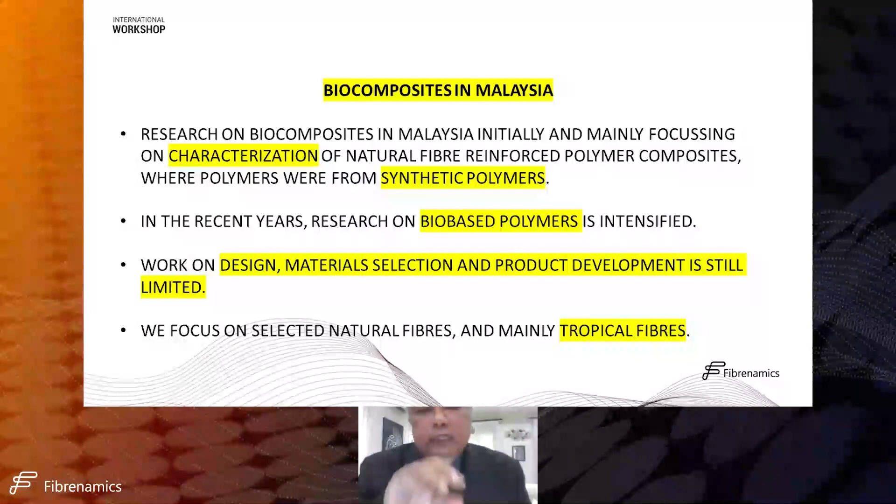This is one thing our research group has done, on design—mainly conceptual design, materials selection, and product development, including life cycle analysis. There was a question to Dr. Mariam earlier; we have done some work on life cycle analysis, but for the natural fiber, we mainly focus on tropical fibers.

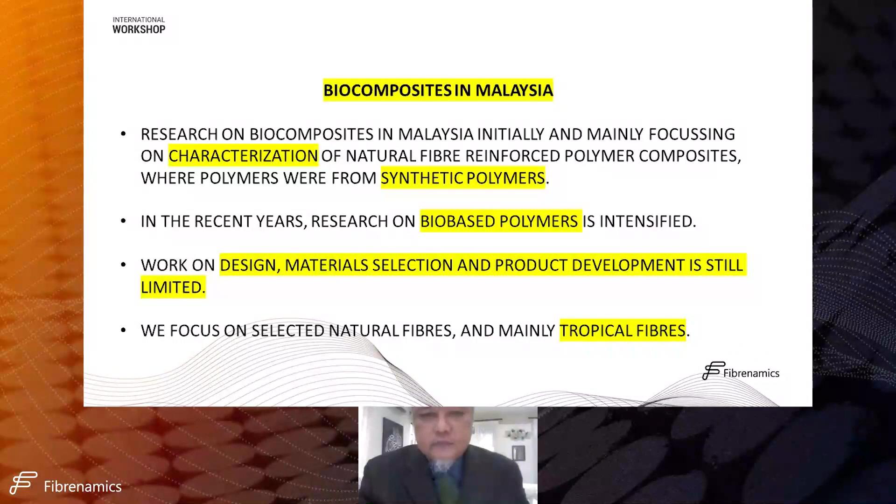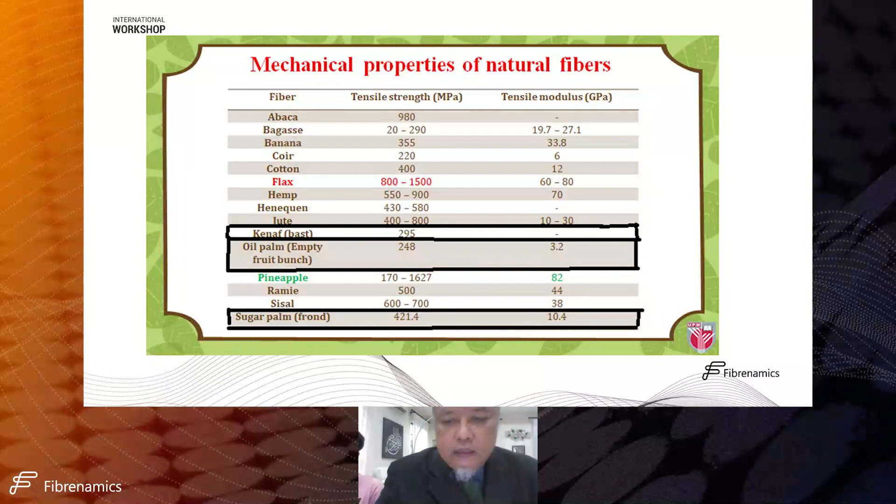Another important fiber our research group is working on is sugar palm. I think this plant is not known to many people, but this is our main strength. It has quite good tensile strength, 421.4 megapascal, and 10.4 gigapascal modulus. I will go into detail on these three main fibers that we work with for biocomposite.

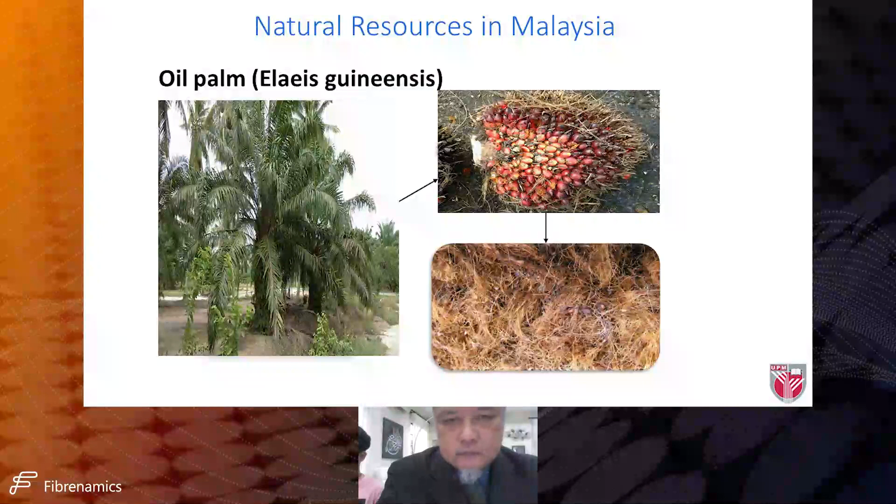Let me explain briefly the history of oil palm, or palm oil. In our country, the first plantations were mostly established and operated by British plantation owners, such as Sime Darby and Boustead, and remained listed in London until the Malaysian government engineered their Malaysianization throughout the 1960s to 1970s.

The latest information about this product: last year, Malaysia accounted for 25.8% and 34.3% of world palm oil production and export respectively, meaning a significant amount of world palm oil production.

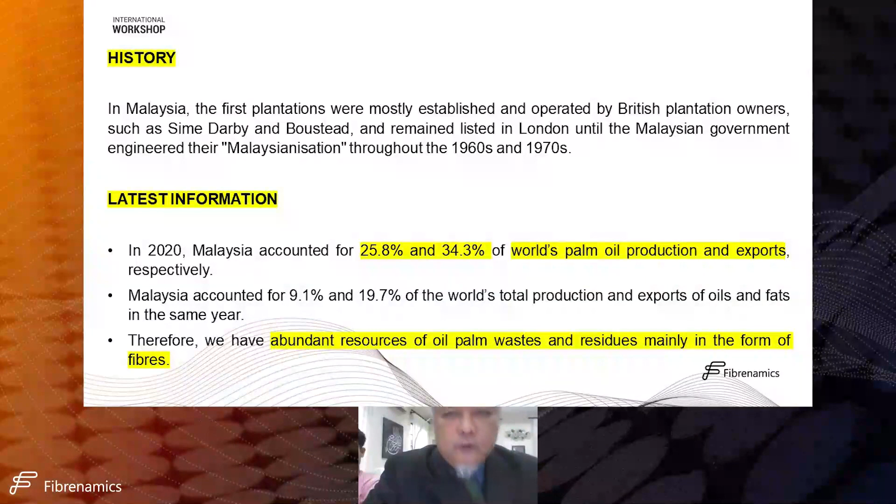Malaysia accounted for 9.1% and 19.7% of the world's total production and export of oil and fat in the same year. Therefore, what I can conclude is that we have abundant resources of oil palm waste and residue, mainly in the form of fiber, that our research group has made or will make full utilization of.

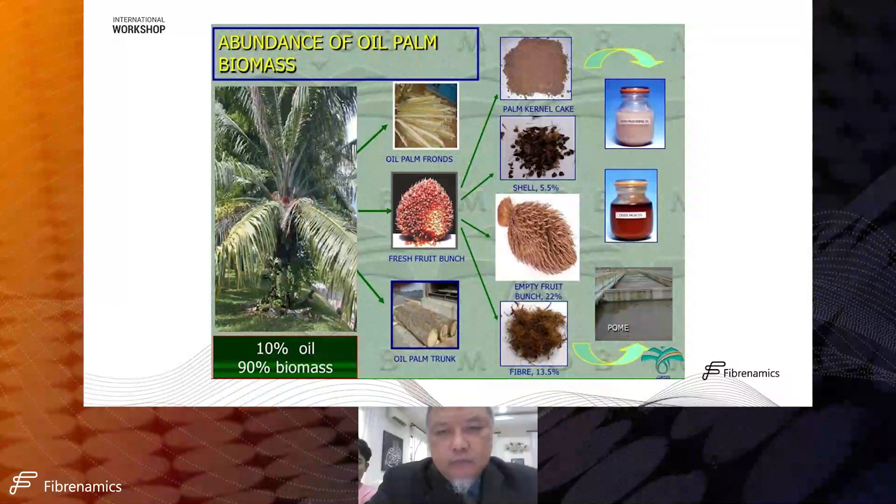...effluents. And from this, I can conclude that 10% goes to oil, but 90% is biomass.

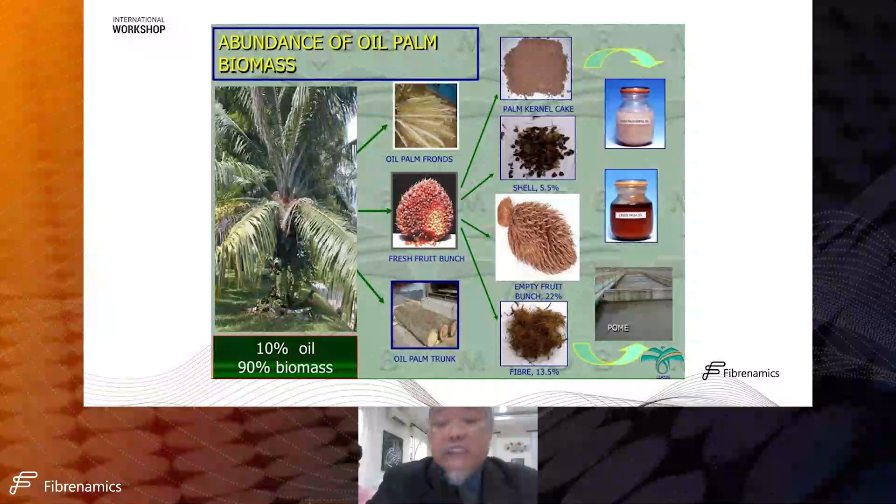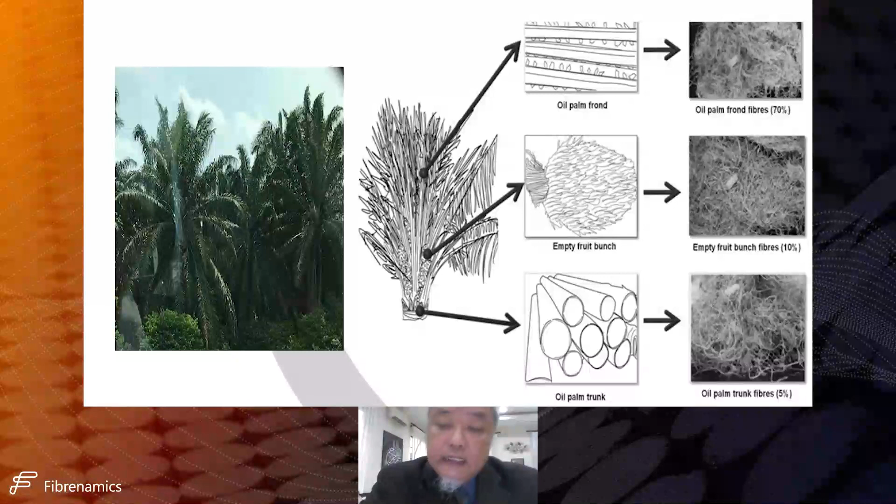Okay, we focus on the fiber alone. So look at the plant. We see that oil palm fronds produce oil palm frond fiber, which is 70%, and the empty fruit bunch gives us empty fruit bunch fiber, which is 10%, and oil palm trunk gives us oil palm trunk fiber, which is 5%.

The oil palm fibers are used as reinforcement and fillers in composites, in biocomposites. They are used with thermoplastic, mainly, and thermoset, including biopolymer. This composite has wide application in furniture and automotive components.

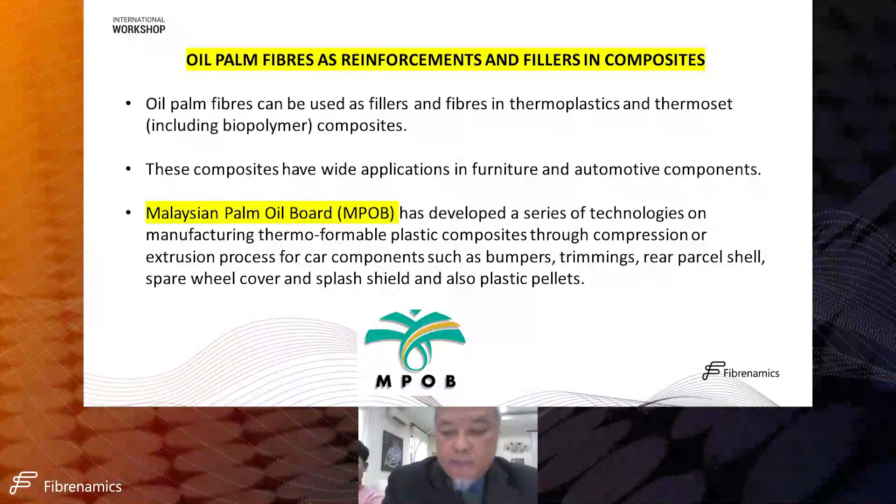Malaysian Palm Oil Board, MPOB, has developed a series of technologies on manufacturing thermoformable plastic composites through compression or extrusion process for car components such as bumpers, trimmings, rear parcel shelf, spare wheel cover, and splash shield, and also plastic pellets. Now I will explain the research work that we have carried out.

Using oil palm fiber, it is quite recent. The grant was provided by Sime Darby, a quite famous company, so they provided us some money. We are working on developing the safety helmet through a holistic integration of practice, ergonomics, and engineering among oil palm plantation harvesters. This is the title.

This project is huge. It's not just focusing on natural fiber composite, but it is beyond that, working on the ergonomics and other design aspects. But at the end, one of the products is the biocomposite safety helmet.

So there are 4 objectives of the work. The one related to this lecture is the development of a sustainable material to improve the newly proposed customized safety helmet.

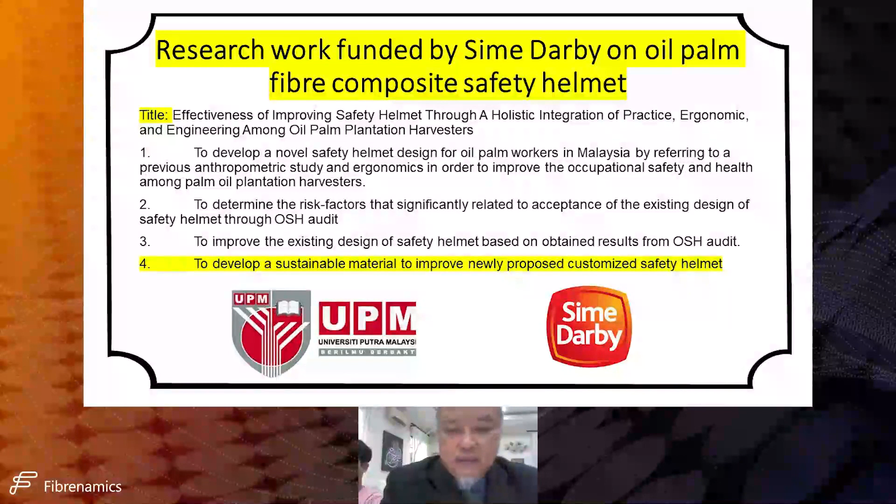The journey of making a safety helmet for agriculture - it is none in the world, so we tried to develop the safety helmet for plantation workers to protect at least the head and body.

Empty oil palm fruit bunch fiber composite is very promising material to be commercialized, especially for low-cost products. The fiber itself is not capable of producing very high impact product and high structural product, but for the low-cost product it has been implemented. Low cost means cheap raw materials, requires less energy to fabricate, and most importantly, the material is environmentally friendly.

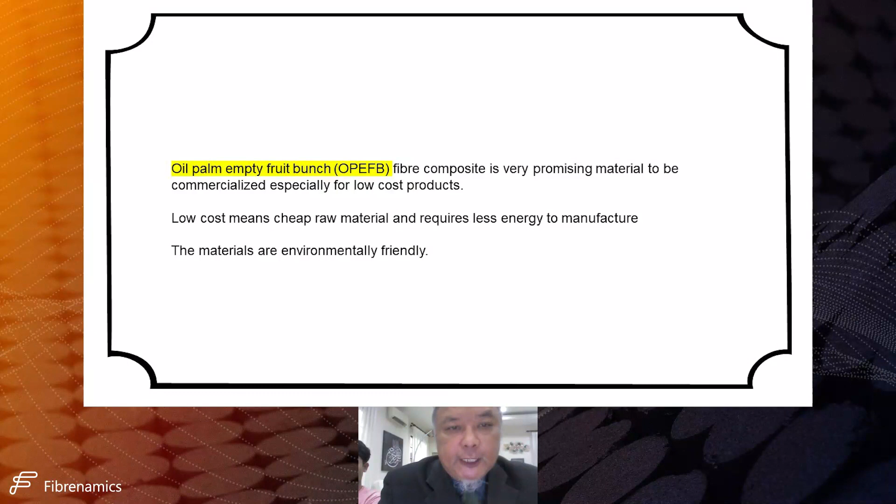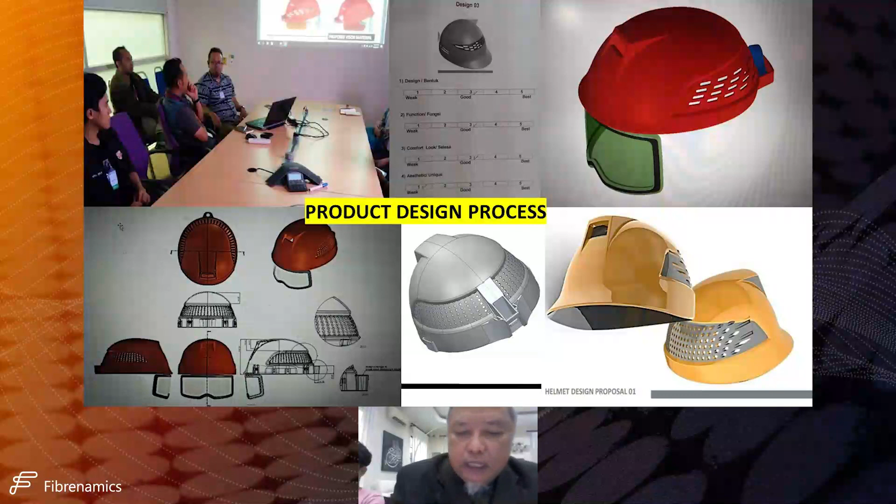We have done a series of designs to improve, because it's a new product, so to develop the new design for the plantation workers. A group of designers sat down together and came up with a concept of the helmet, and through some prototyping, a 3D model and solid modeling.

We have done some publication work. Mainly we start with the hand layup process. I think this is quite a simple process, but to start with, to produce the prototype, we managed to produce 20-30 helmets from the oil palm. But I just want to emphasize here, this is only at the developmental stage.

We produced the helmet, and we also took care of the aesthetic value, the finishing, the painting. This is some of the effort for improving the product. We do some kind of testing, fitting all the accessories on the helmet.

This is what we hope from the project, that one day Sime Darby will implement it for each and every worker working in the plantation. We can use this in Malaysia, and in our neighboring country, Indonesia. But I just want to highlight here, we have not...

This product has not been used yet, but it has been submitted as the final product and was launched by our former Prime Minister in one of the events. To me, this is something new that we have done for the benefit of the people.

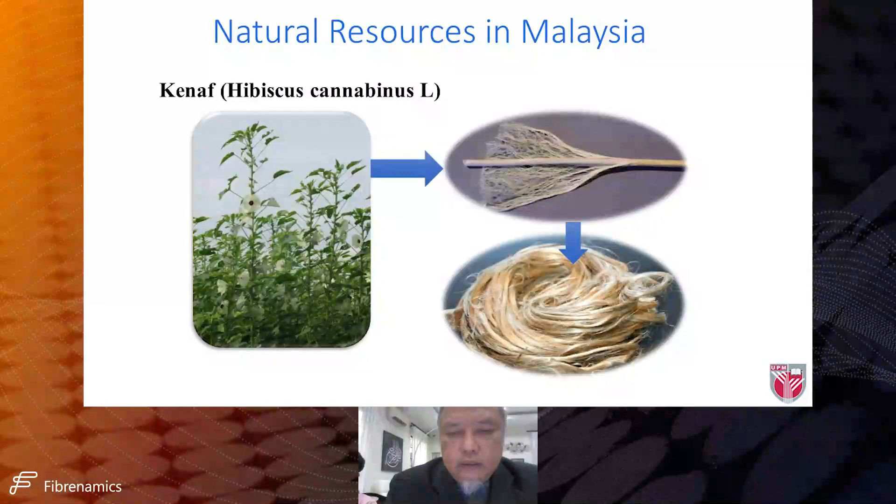I just want to do some introduction on the kenaf industry in Malaysia. Kenaf was introduced in Malaysia in the early 1970s and was recognized as a potential alternative fiber material for the pulp, paper, and wood composite industries in the late 1990s under the 7th Malaysian Plan, 1996 to 2000. Compared with other plants, the yield of kenaf is relatively higher, up to 25 tons per hectare, thus presenting more economic advantages.

For the past several years, kenaf fiber has been shown to be suitable for composite applications such as particle board, MDF, wood plastic composite, non-woven material, and pultruded product. The characteristics of kenaf fiber are similar to those of wood compared to hemp, flax, and jute fiber. They have similar properties.

According to research results, kenaf yield of 12 to 30 tons per hectare is greater than hemp, flax, and jute, thus providing more cost-effective raw materials. It was reported that under the Malaysian climate, yield of kenaf varies from 2 to 25 tons per hectare.

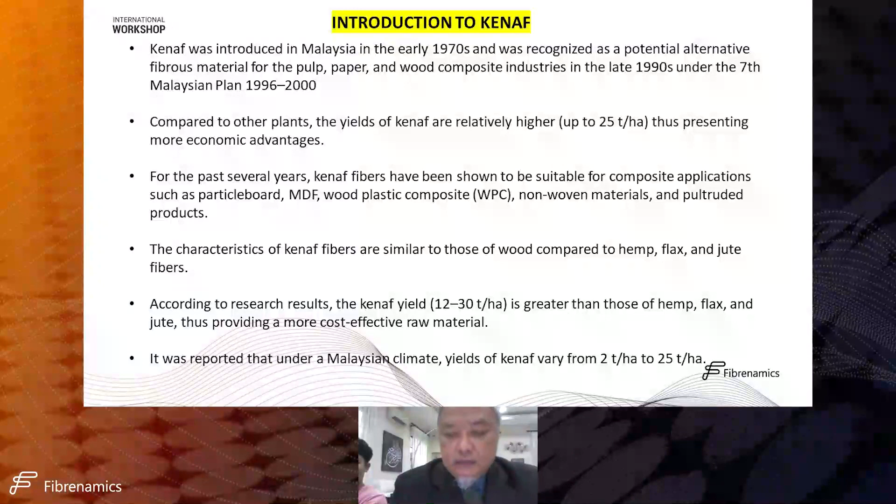This is the board, the agency that deals with kenaf, the National Kenaf and Tobacco Board Malaysia. This agency was actually meant to slowly replace tobacco, which is why the name kenaf and tobacco is included together. We have done quite a number of works on kenaf.

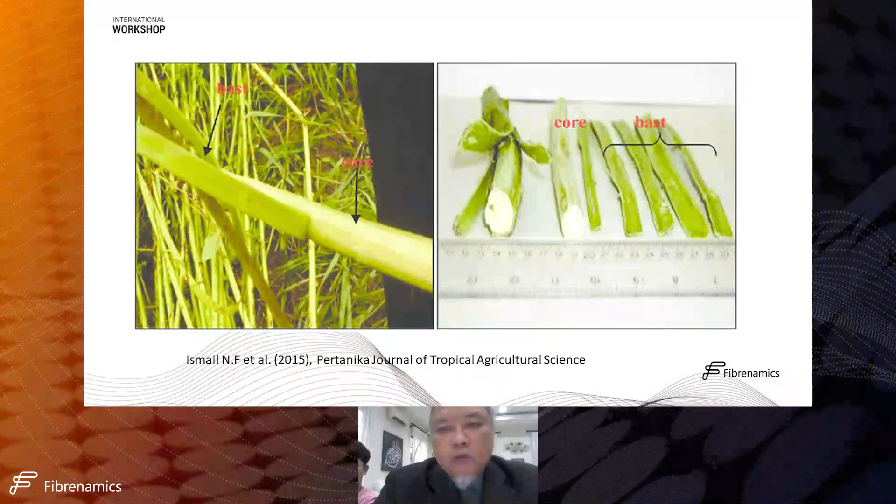We published work with CRC Press three years ago on kenaf fiber and composite. As you can see here, kenaf comprises the bast and core. Both bast and core can be used for biocomposite.

I want to share some properties of kenaf and non-wood fibers. Kenaf bast tensile strength, as I mentioned earlier, ranges from 295 up to 1,191 megapascals, and the modulus can go up to 60 gigapascal. They are quite comparable with other important fibers like hemp, jute, flax, and sisal. I also include oil palm, which is our main product, as comparison.

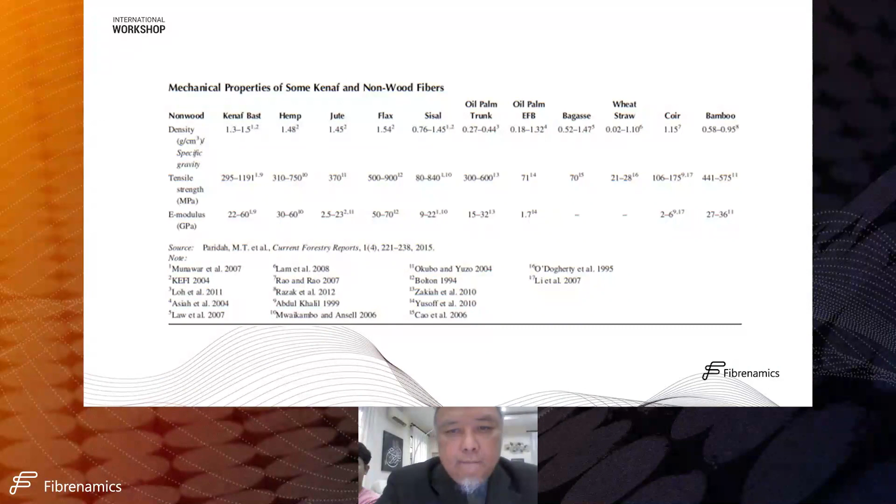I want to share one of the recent research works on kenaf, for the defense industry: hybridization of Kevlar and kenaf fiber reinforced epoxy composite for ballistic protection. Our colleagues at UPM are working on armor protection, as shown on the left hand side, but my research group focuses on work on spall liners for military vehicles.

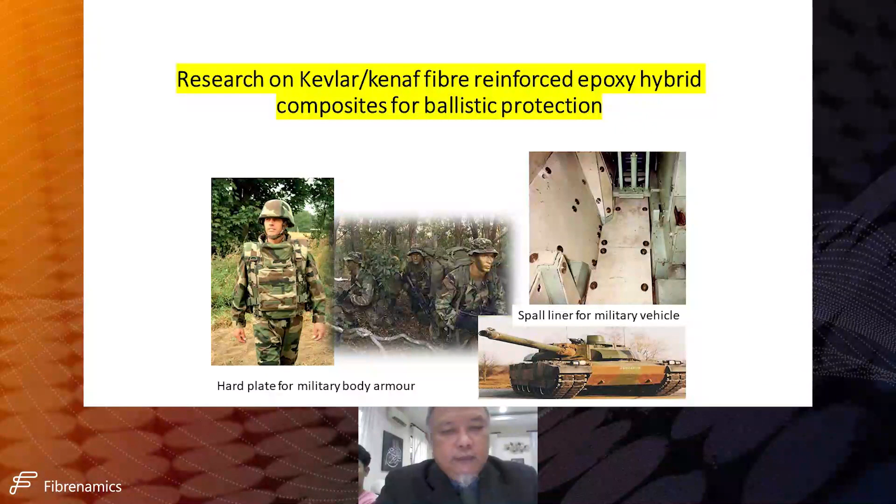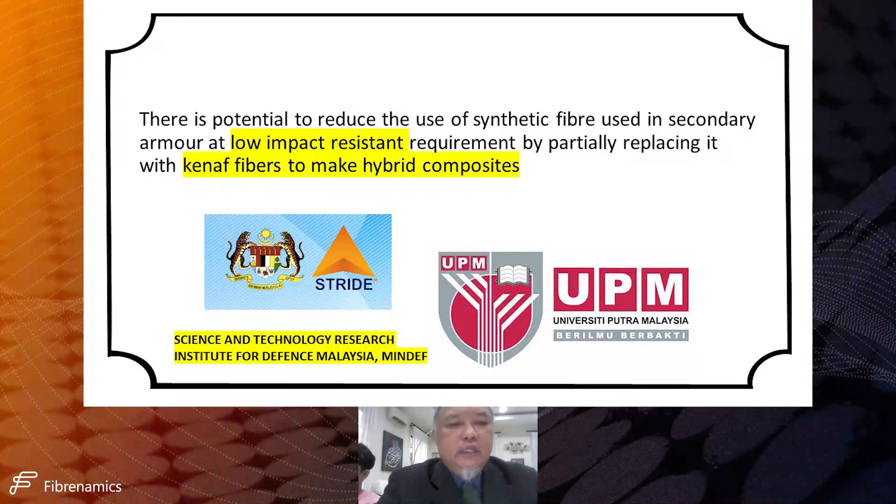So to develop and study the use of kenaf in hybridization with Kevlar for the spall liner, one of the important components in a tank, the work was done in collaboration with the Science and Technology Research Institute for Defense Malaysia under MINDEF. We want to produce this - I mean there is potential to reduce synthetic fiber by replacing it partially with kenaf fiber to make a hybrid composite.

Now this is the spall liner that I mentioned. Spall liners are composite panels made mainly with synthetic fiber, mounted to the inside of the shell structure of armored vehicles. They protect personnel inside by catching small fragments of the outer shell blown into the vehicle by the concussion of incoming ordnance before it contacts them.

Used alone or in combination with metal or ceramic, spall liners help increase crew survivability in combat. You can see in the picture at the bottom, with spall liner and without spall liner, some safety issues can be solved or minimized. In the market, spall liners are made using woven glass fiber, and also polyethylene and polypropylene with aramid fiber - this is what the products in the market look like.

So we try to replace, or at least incorporate and hybridize, kenaf fiber, so that at least some green material will be inside those vehicles.

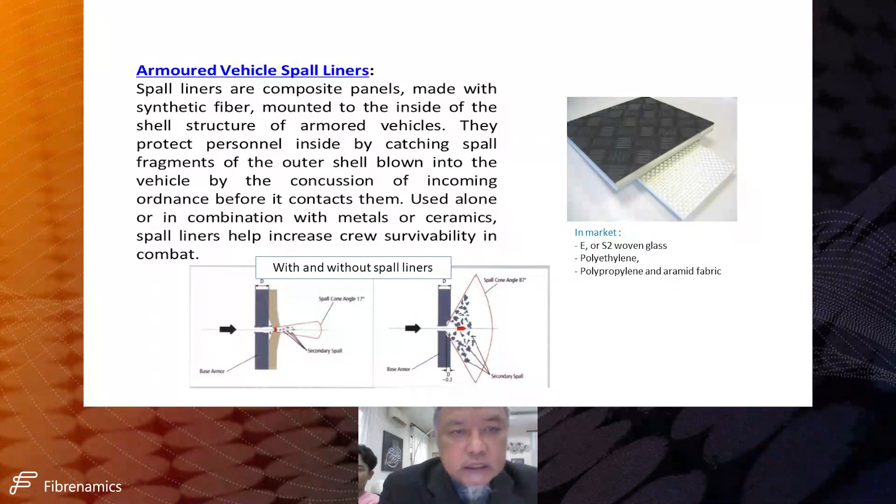The left hand side is all Kevlar, and B is the hybrid of kenaf and Kevlar. The left hand side is all Kevlar, and B is the kenaf and Kevlar hybrid. C is also hybrid but with a different arrangement. D is also a hybrid again, and E is all kenaf.

So what we did was check which combination is the best, to investigate which one performs best. Of course all Kevlar is the best one - I think this is quite common sense. But we wanted to see what the contribution of kenaf is there.

Kenaf and Kevlar fabric were hand laid up with the epoxy matrix by mixing epoxy and amine hardener in the ratio of 2:1, and two thick mild steel plates were used as the mold.

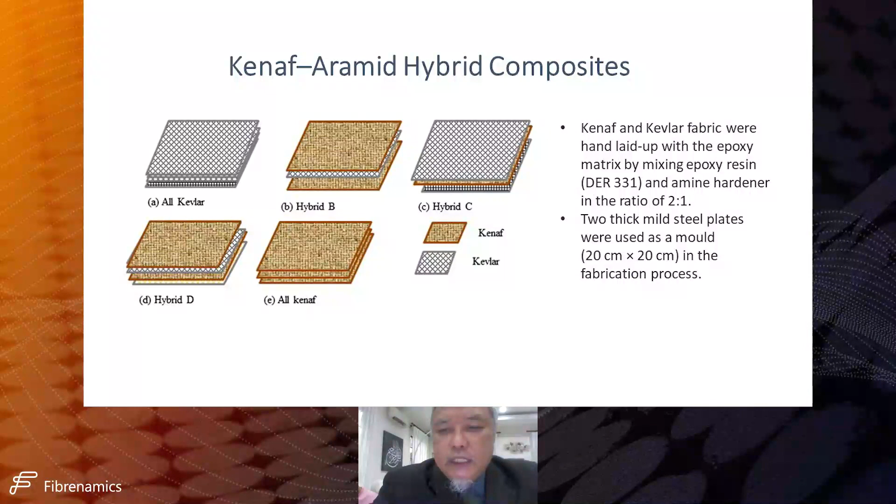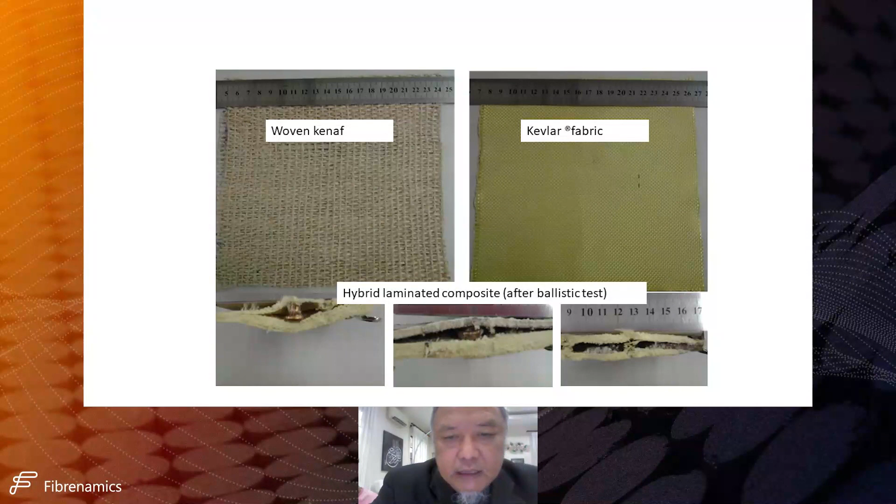This is quite simple - this is the outcome, or the material we use: woven kenaf. Woven kenaf, by the way, is not easy to get - not many companies are producing that. Mainly we can get kenaf in the form of non-woven, and Kevlar on the right hand side. So we tried to hybridize them. The photos below show the hybrid laminated composite after the ballistic test.

We carried out quasi-static punch shear tests to study the penetration resistance of composite under static load, focusing on the penetration process, penetration resistance, energy absorption, and failure of hybrid laminate composite. This experiment was carried out to understand the penetration behavior of Kenaf-Kevlar hybrid laminated composite under quasi-static loading. On the left-hand side is a schematic of the quasi-static punch shear test, fixtures, and the conical shape penetrator used in this study.

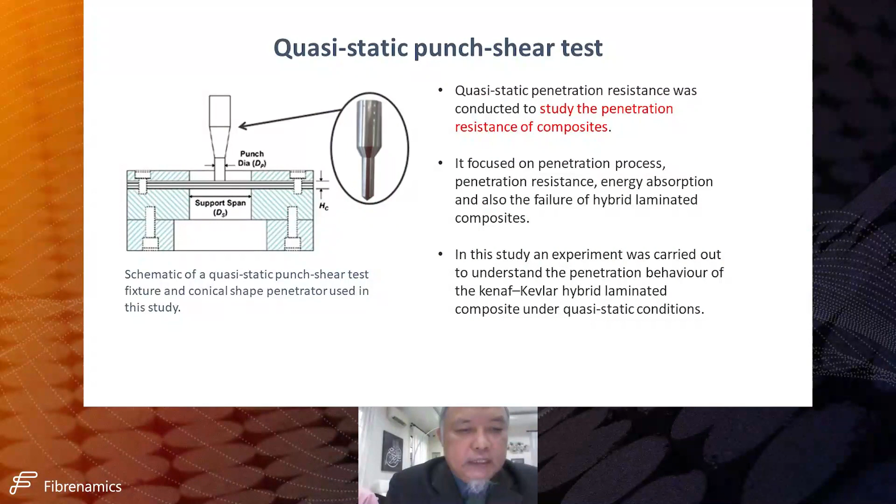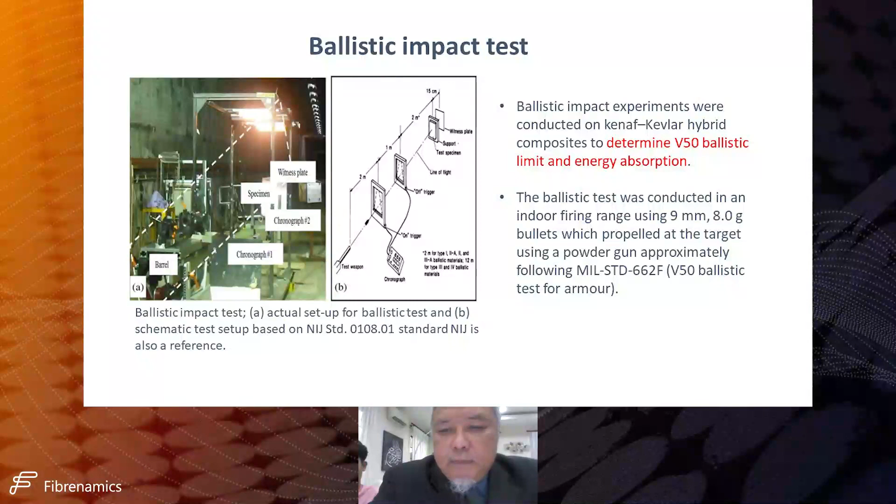The ballistic test was conducted in an indoor firing range using a 9 millimeter, 8 gram bullet, which was propelled at the target using a powder gun, approximately following the standard for ballistic test for armor.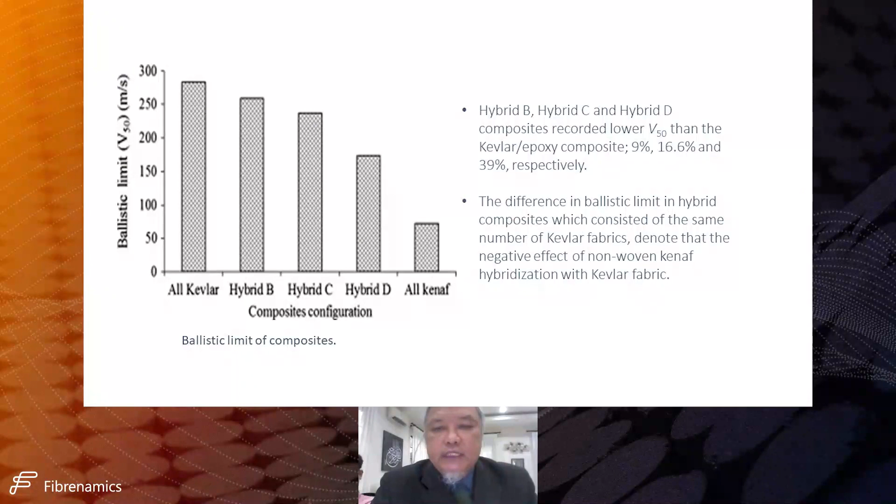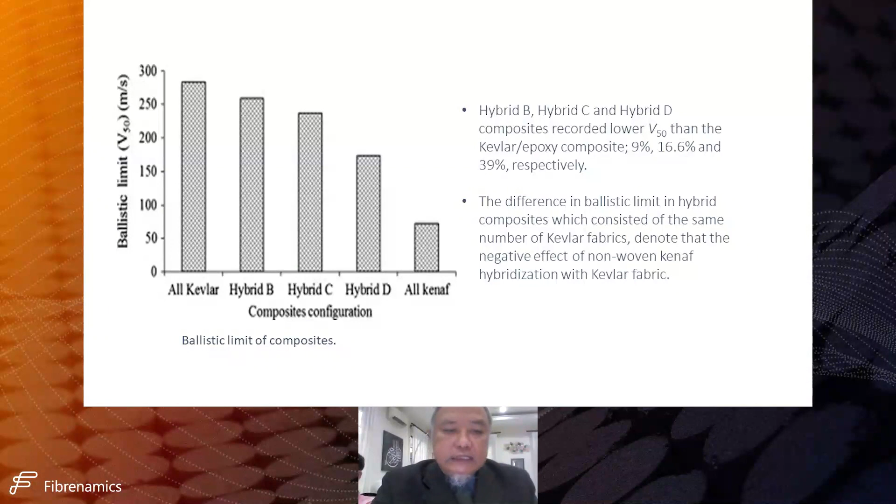This is some of the results we obtained in terms of ballistic limit, comparing the material from all Kevlar to all Kenaf. We can see all Kenaf has got the lowest value. Hybrid B, C, and D recorded lower than Kevlar epoxy composite by 9, 16, and 39 respectively. The difference in ballistic limit in hybrid composites, which consisted of the same number of Kevlar fiber layers, denotes the negative effect of non-woven Kenaf hybridization with the Kevlar fabric. So we can see that with Kenaf, the value is reduced.

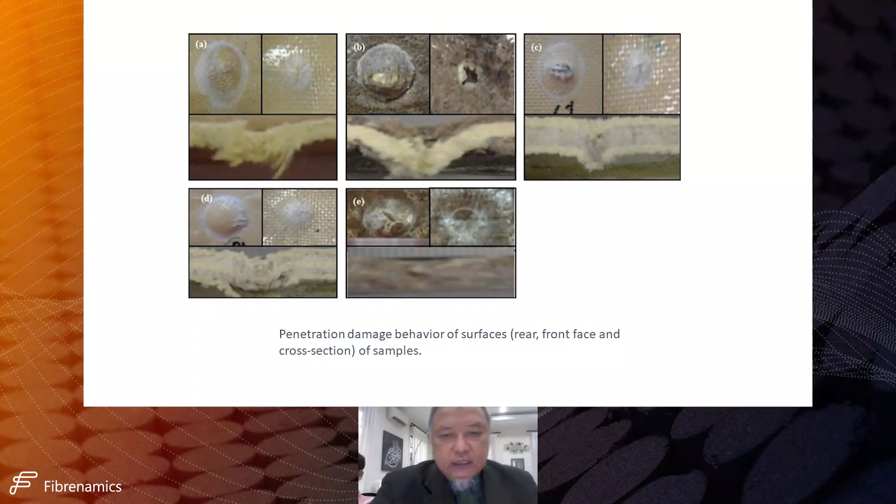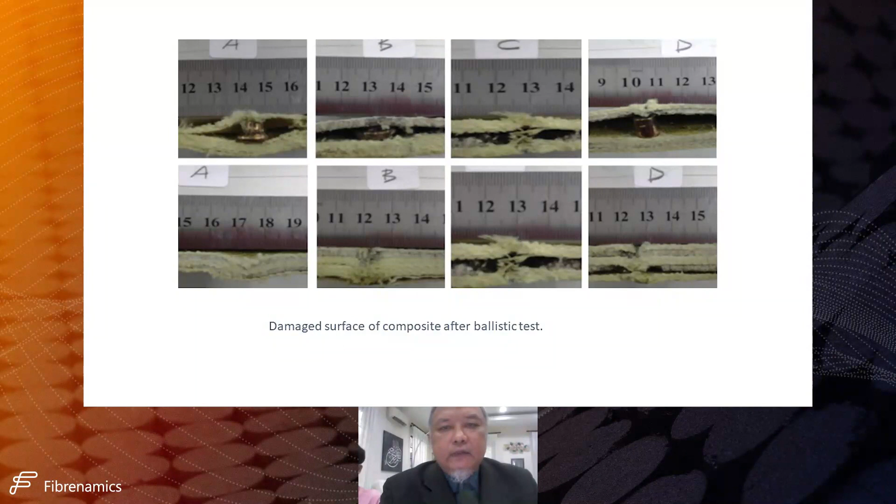This is a picture of the penetration damage behavior showing the rear and front surfaces and cross section of the sample, and the damage surface of the composite after the ballistic test. From this study, we wanted to see where Kenaf can contribute in terms of ballistic study in the defense industry. With this, we managed to publish, and will soon publish, a book called Composite Solutions for Ballistic Applications, which includes our work on the use of Kenaf and natural fiber composite in ballistic applications.

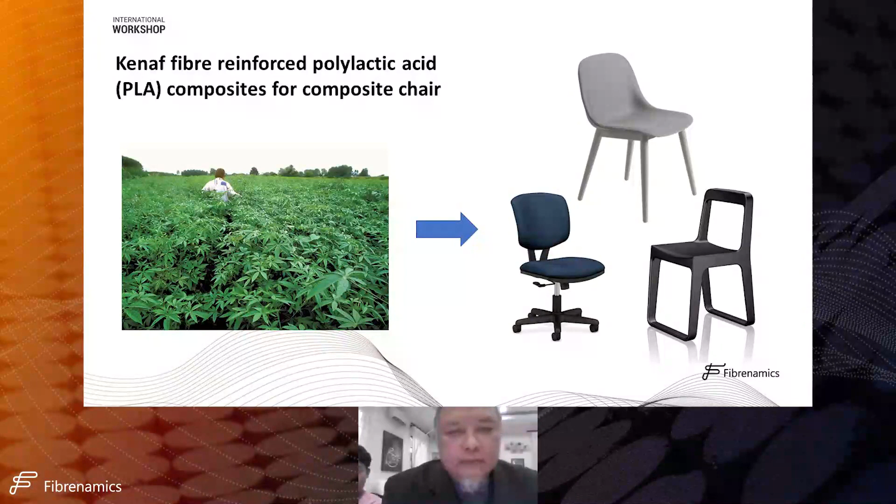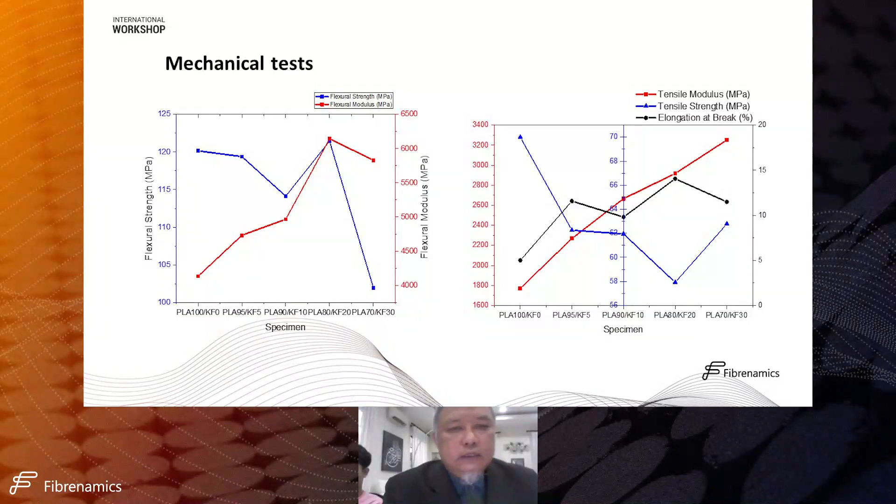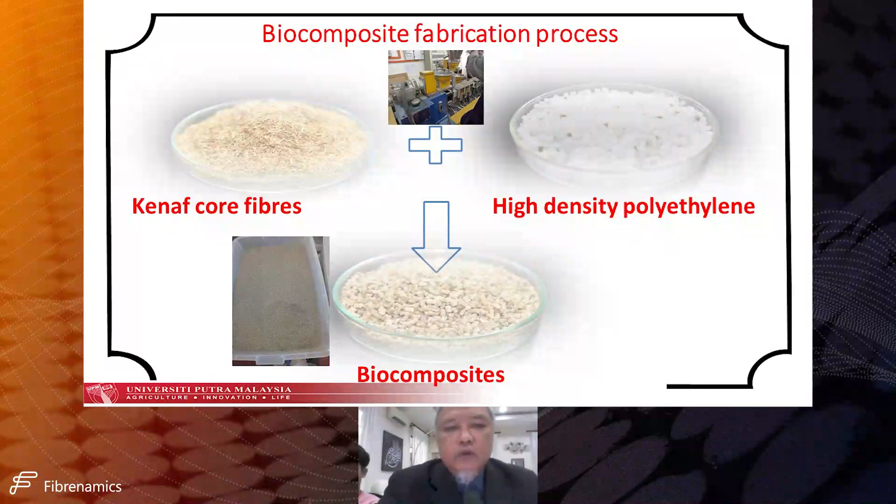To make the composite, we start with Kenaf core fiber and mix it with high density polyethylene to become a biocomposite. The production process is quite simple, using injection molding. We take the biocomposite comprising high density polyethylene and put it into the hopper of the injection molding machine, making it into the Putra Frame after some assembly.

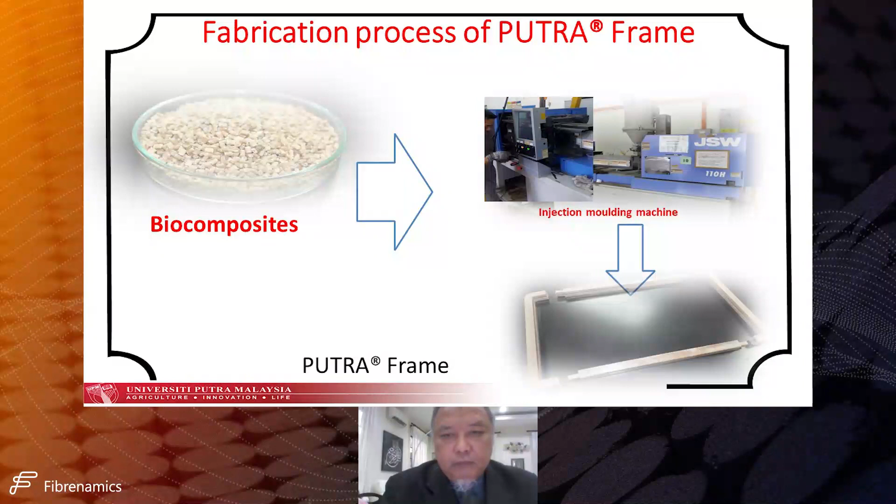This is how the assembly process took place. We also included the logo of our university and good packaging. It was successfully commercialized and launched in 2017-18 by our former Minister of Agriculture.

The next source of fiber I want to focus on is the sugar palm. I think many people are not familiar with this — it's called Arenga pinnata. This is the plant, and people say it's useless; people misuse this plant, they just burn it down. But our research group managed to get the fiber, extract it properly, and make use of it.

The properties of sugar palm fiber: on the left-hand side, tensile modulus is 5.9 and tensile strength is 276.6. To me that is quite good, because this fiber has been used in the past, like in the Sultanate of Malacca, where they used it to make small boats. Even during British rule in Malaysia, it was used as ship cordage. This means the fiber has very good quality — for instance, in terms of durability, the longer you soak it in water, the better the properties become.

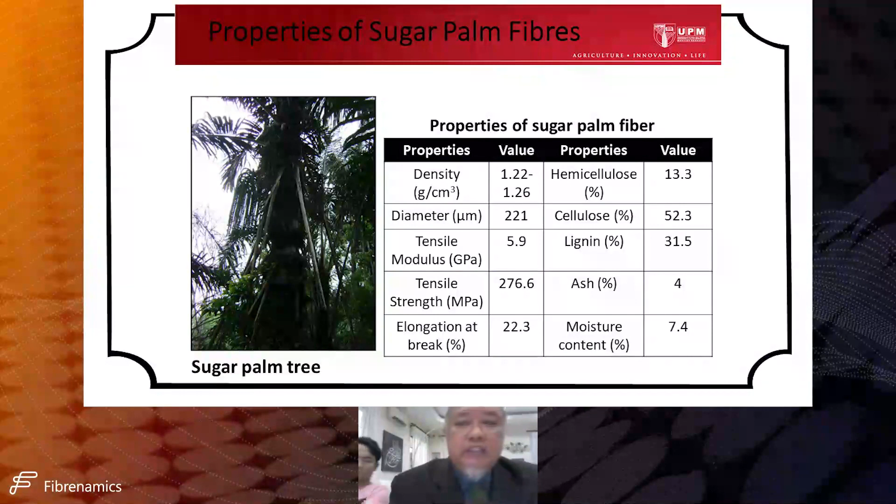It's quite amazing, so we believe this plant has so much potential. We managed to publish a book with CRC Press dedicated to this fiber and biopolymer from the sugar palm plant. One of the recent products we developed is a solar panel from sugar palm.

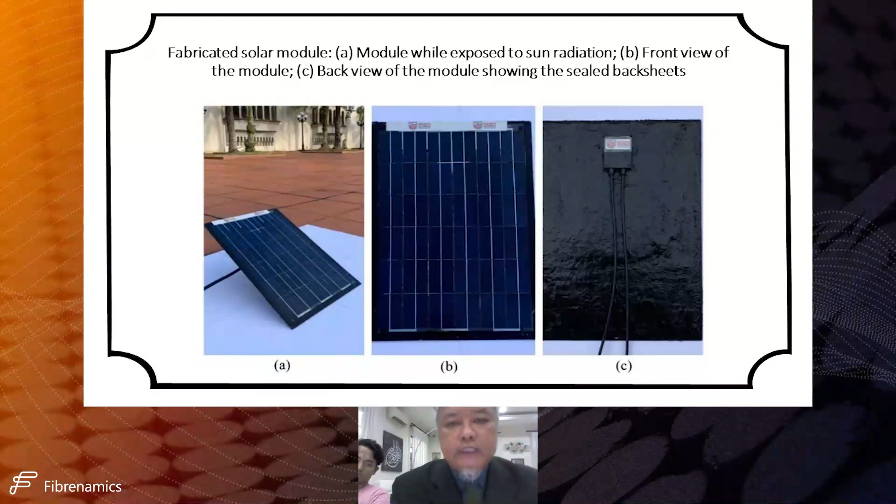We want to develop this product further. This is the fabricated solar module. A is a module while exposed to sun radiation, B is the front view of the module, and C is the back view showing the sealed back sheet. This is one of our recent products made from sugar palm fiber biocomposite as part of the component in the solar panels. We have protected this through IP, and a company will try to commercialize this product next week.

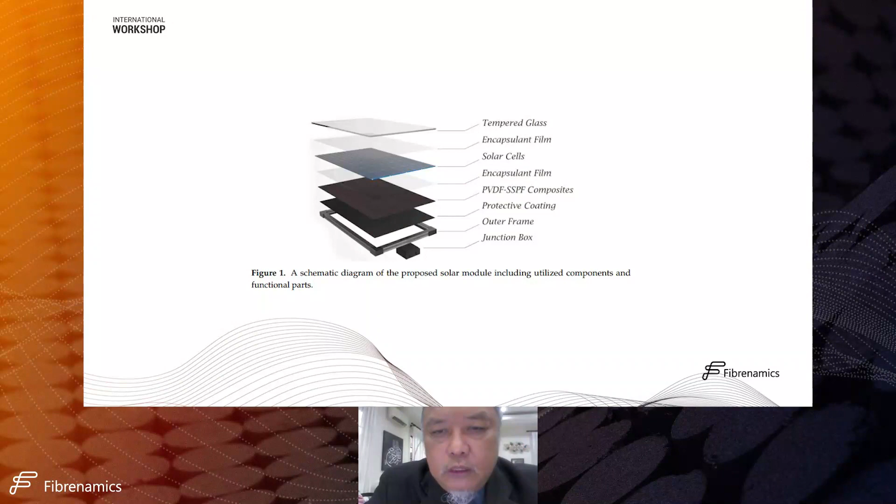This is the schematic diagram of the proposed solar module, including the utilized components and their functional parts. We can see there are tempered glass, encapsulant film, solar cell, encapsulant film again, and then this is where the biocomposite from sugar palm is included. PVDF is one of the advanced polymers, and short sugar palm fiber composite is included in between.

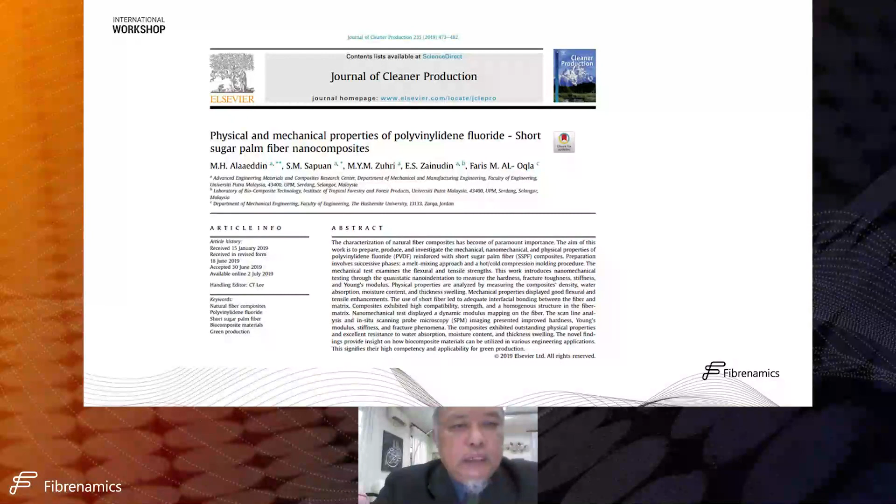We published work on the physical and mechanical properties of this product, and I'll go through some of the results and activities we carried out. This work aimed to prepare, produce, and investigate the mechanical, nanomechanical, and physical properties of PVDF reinforced with short sugar palm fiber composite. We used the melt mixing approach and hot and cold press molding, and carried out mechanical testing and physical testing including density, water absorption, moisture content, and thickness swelling. The mechanical properties displayed good flexural and tensile enhancement, and the use of sugar palm fiber led to adequate interfacial bonding between fiber and matrix.

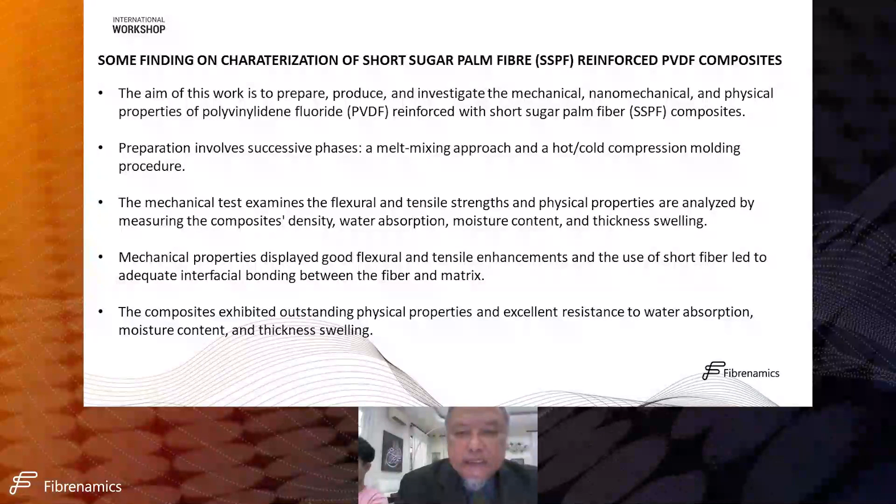Now, again with the sugar palm fiber, we worked on hybridization with glass fiber with Proton - the national car company of Malaysia - to produce a product component called the anti-roll bar. These are the components we tried to replace. We got technical help from Proton - they gave us drawings and advice on how to produce it. It was quite a big challenge because sugar palm fiber is not that strong, and its mechanical performance is not that good.

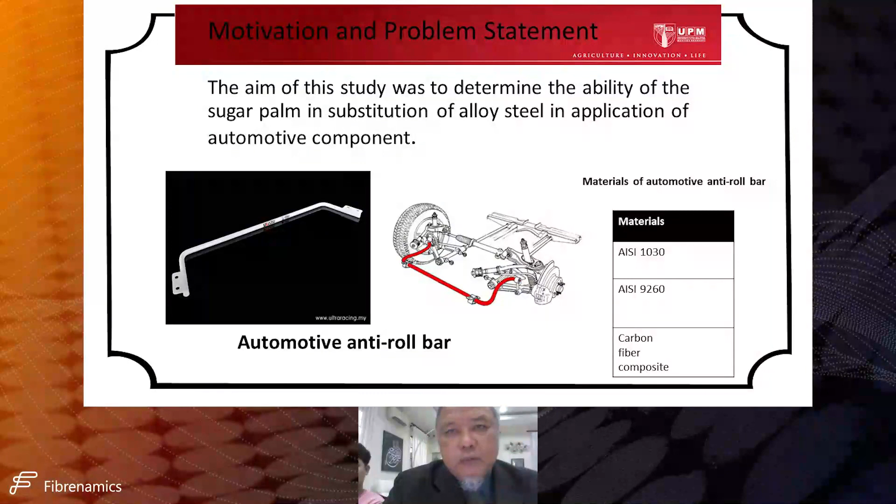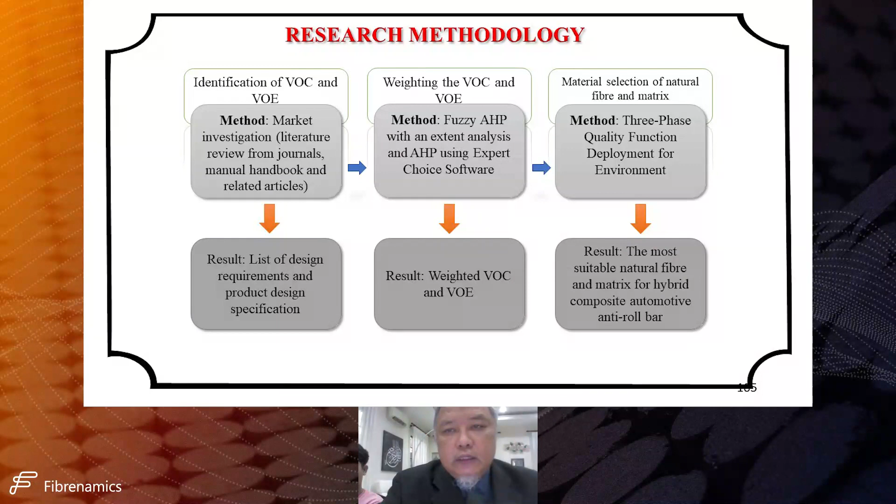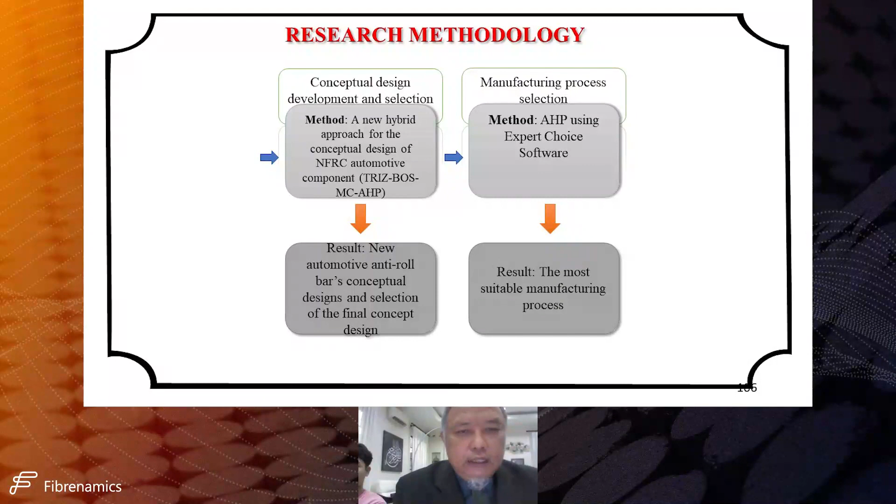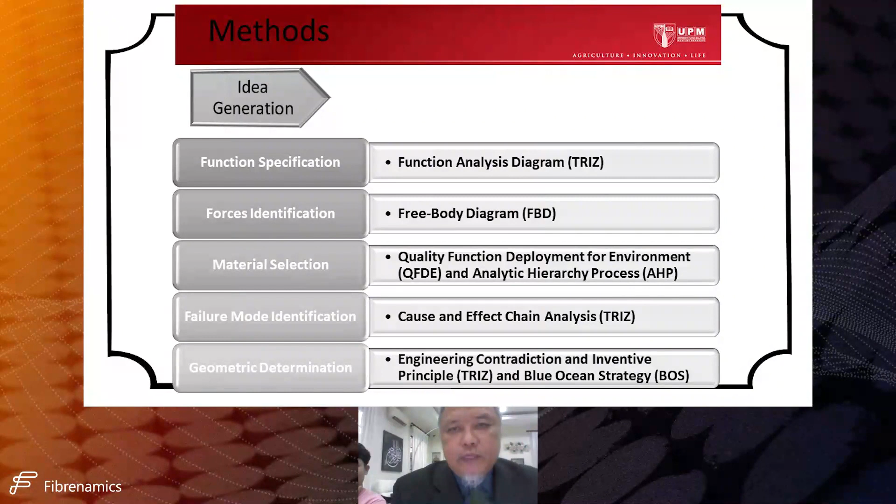Our research group was entrusted to carry out the conceptual design, and prior to the pre-publication work, we worked on identification of customer and environment, then material selection, conceptual design, and manufacturing process selection. These are mainly our activities, but our colleagues also worked on development and publication, carrying out idea generation, concept development, and concept selection. The point I want to make is that work on conceptual design of biocomposite is very limited, so we are one of the teams in the world focusing on biocomposite conceptual design, material selection, life cycle analysis, and concurrent engineering of biocomposite.

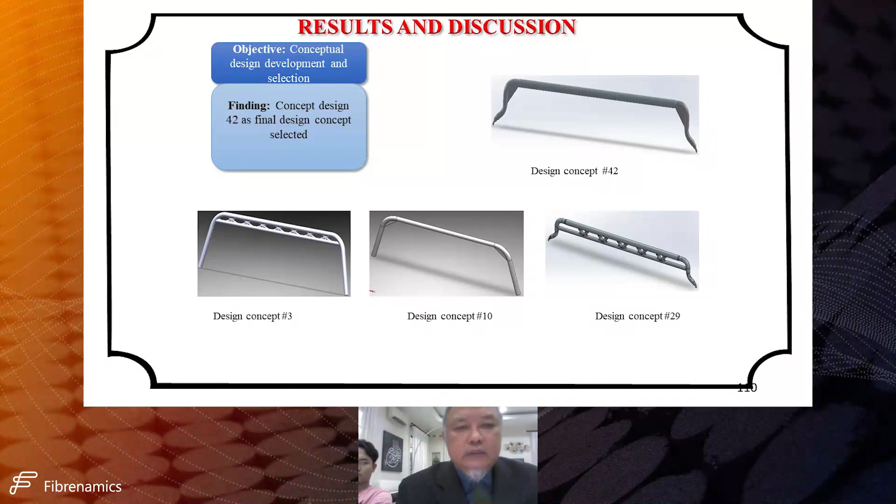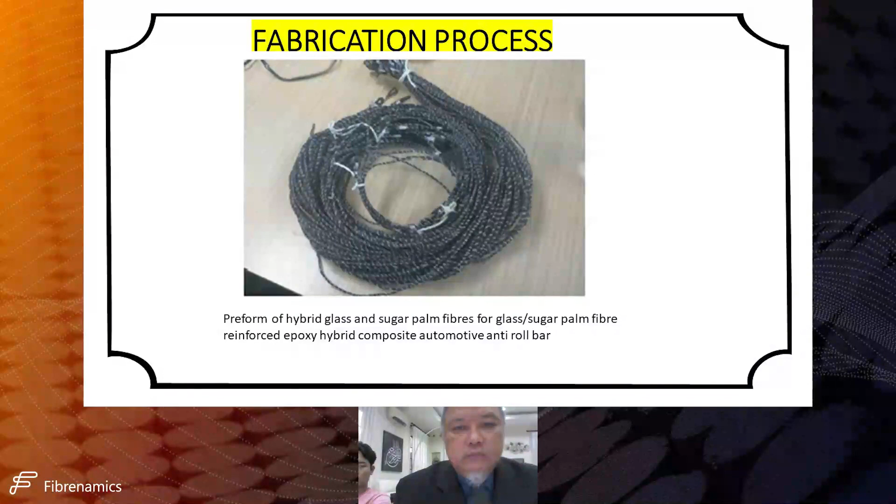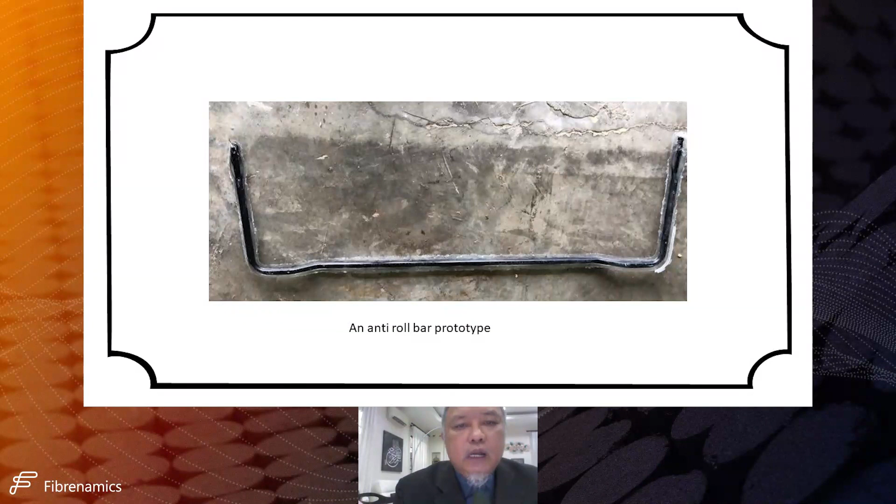For those in design, you're familiar with this: functional specification, force identification, material selection for product development. We carried out the design process using established methods, and these are the concepts we came up with for the anti-roll bar using sugar palm fiber composite. Our colleagues in the other group developed the hybrid glass and sugar palm fiber anti-roll bar using the VARTM manufacturing process. So an anti-roll bar prototype has been developed, and we have some ongoing projects with Proton.

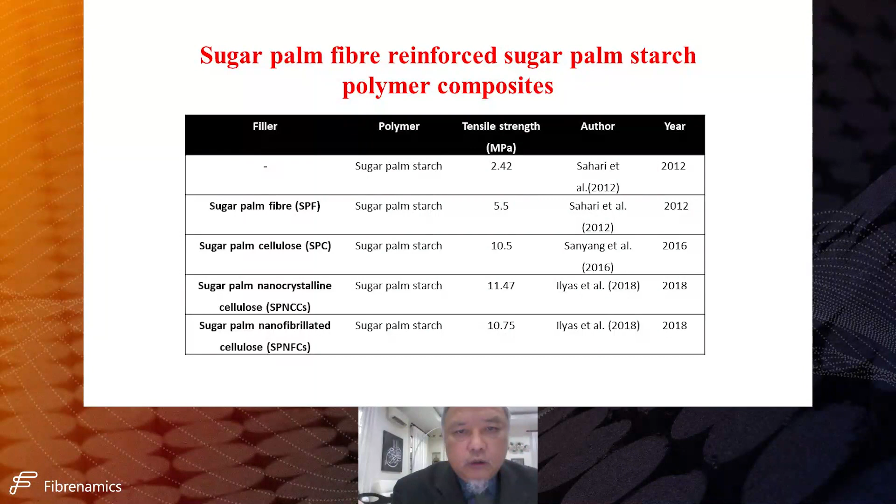Another work is on nanocellulose. It's not my main area, but we want to focus more on sugar palm. As we know, with sugar palm fiber we work with starch fiber biopolymer. This was done by our research group until we came up with the nano stage - nanocrystalline, nanofibrillated. Some of our co-workers are working on that, and this paper is on the development and characterization of sugar palm nanocrystalline nanocellulose starch biocomposite.

This is how the nanocellulose fiber was produced, and also how the starch was produced. It's not an easy job - we have to climb the tree and get the starch, then do some processing to develop the fiber. In the end, using the right plasticizer, we obtained the nanocellulose using the solution casting method to create the nanocellulose biocomposite.

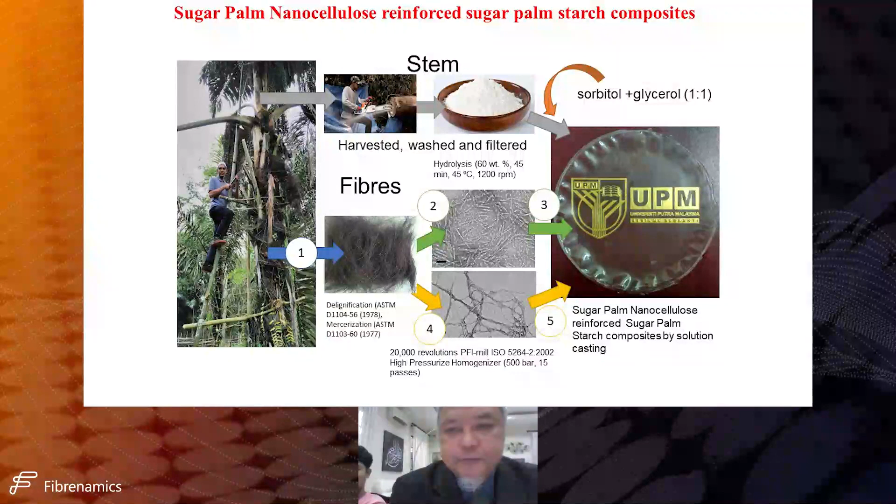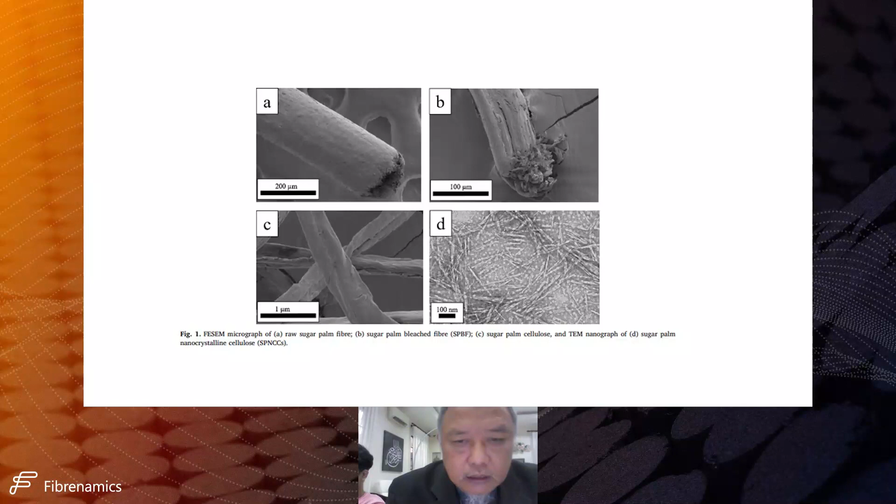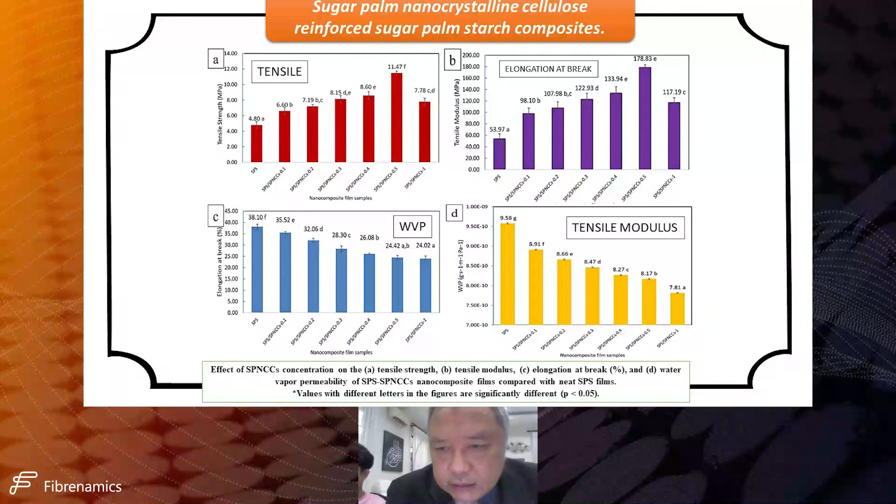In recent work, we wanted to use this for bio-based packaging, so we incorporated cinnamon essential oil. This is quite new work, and we carried out antibacterial activity tests along with mechanical and physical properties testing, to see the potential of this 100% sugar palm product with cinnamon essential oil.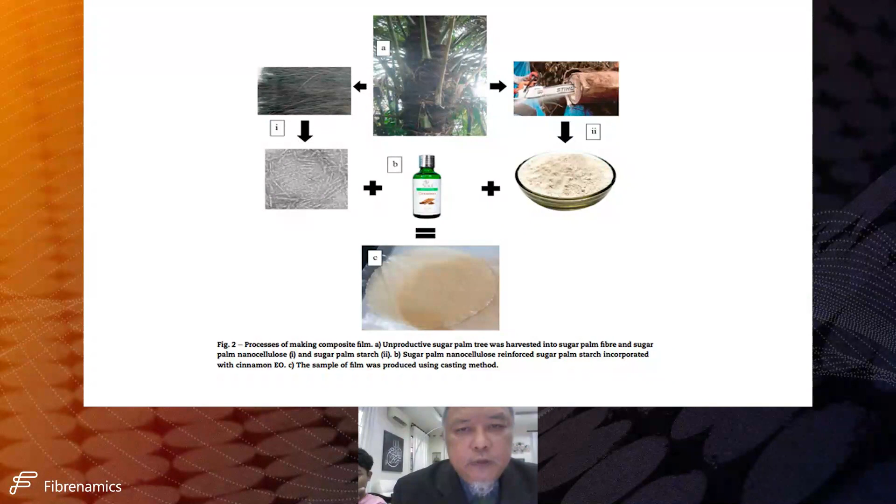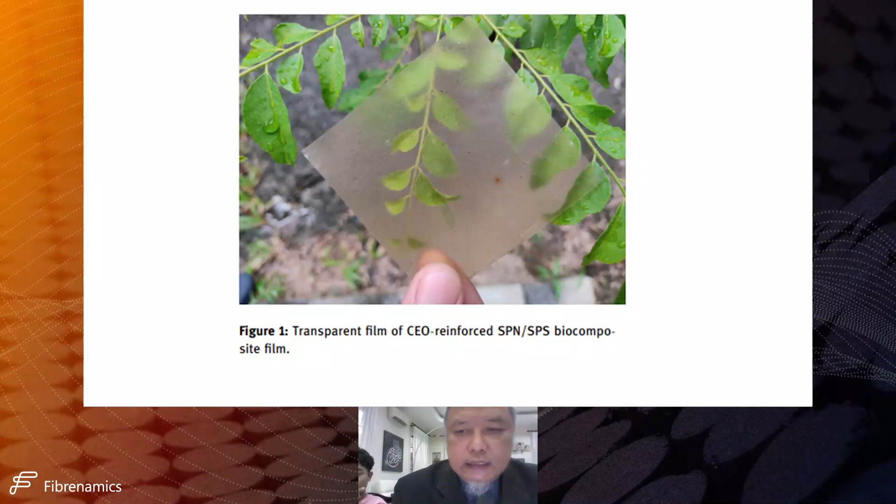This is ongoing work with a few PhD students working on it. This is one of the transparent films from the sugar palm nanocellulose sugar palm starch biocomposite. When we include the cinnamon essential oil, the density tends to decrease, but the tensile strength is not much different in terms of strength properties.

The final project I want to share is from during the COVID-19 pandemic. We got budget from the Ministry of Higher Education to work on sustainable green technology by transforming disinfected COVID-19 non-woven polypropylene waste into briquette char, biopolymer char, and polymer composite through a pyrolysis system. We were given only 6 months to do this.

PP is the major component in manufacturing COVID-19 isolation gowns used by healthcare workers. Using low technology and low temperature, this waste PP sample was pyrolyzed and turned into solid char with long isothermal residence time in a batch reactor. The yielded char was then characterized and optimized, and the optimum one was used for fabricating char sugar palm starch composite.

The mechanical properties, mainly compressive strength, and thermal properties of the char composite with different weight ratios were prepared. The main result showed that increasing the starch biopolymer content enhances the compressive strength of the composite, yet reduces the high heating value.

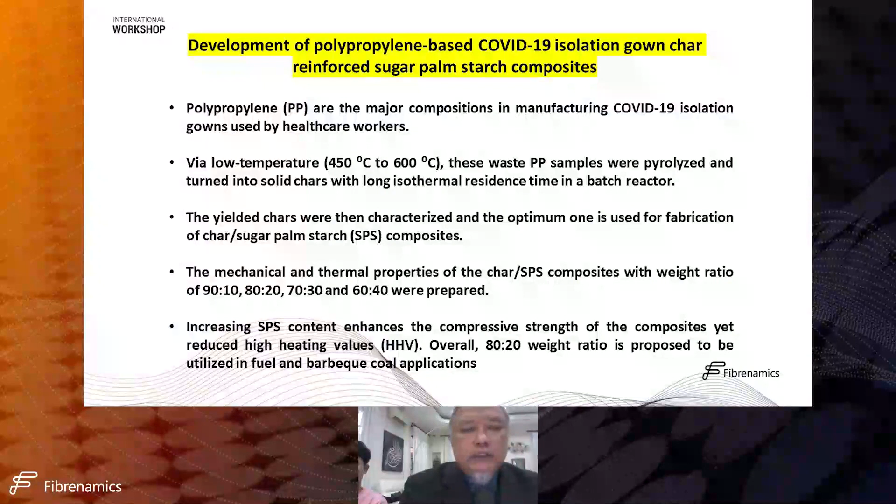This is the objective, which I explained a bit earlier. From the healthcare center, we got the gowns and pulverized them, making them into waste powder using the pyrolysis process flow.

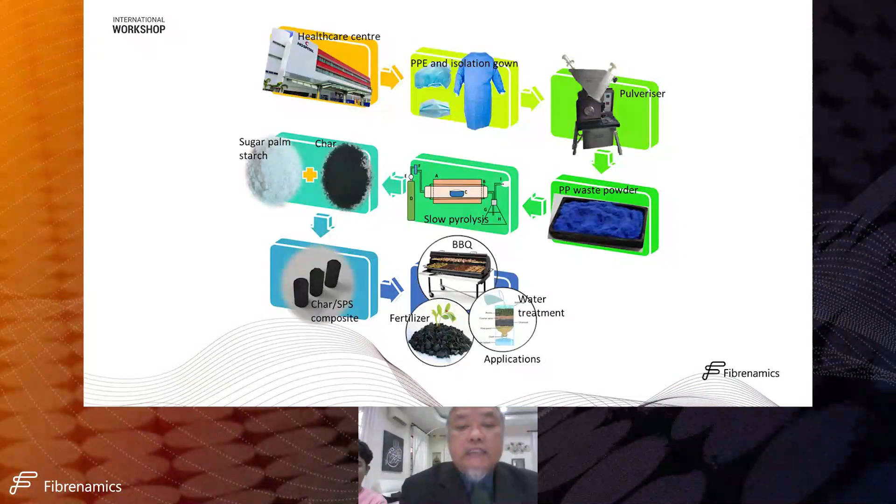We got the char and added sugar palm starch, producing a char sugar palm starch composite that can be used in many applications like barbecue, fertilizer, and water treatment. This is again how we developed the composite.

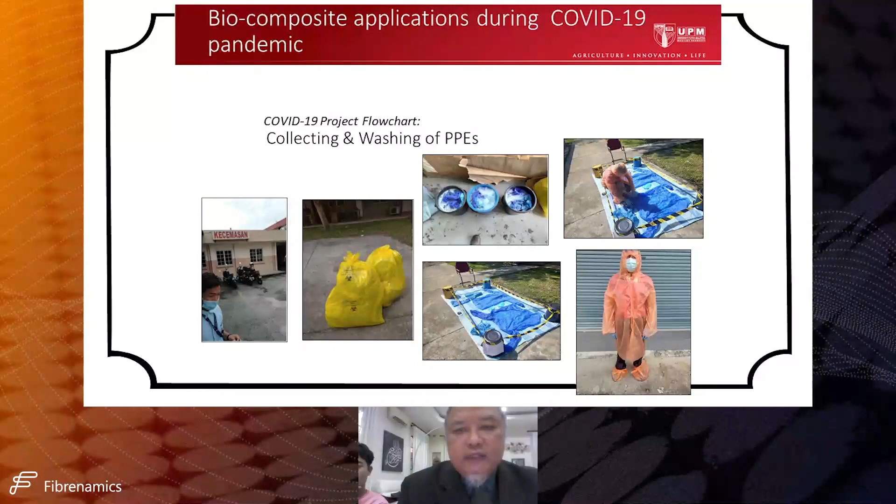This is the gown that we washed properly so it could be disinfected. We collected and washed the PPE and carried out the pyrolysis process.

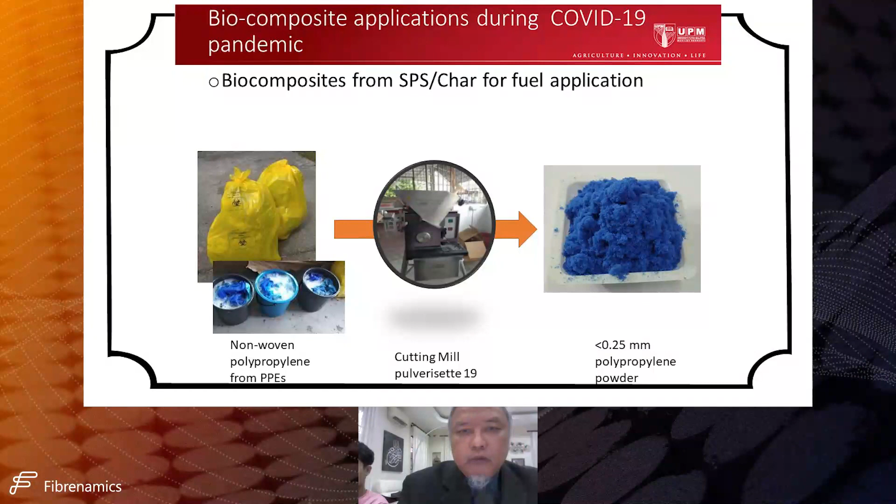From non-woven polypropylene PPE, we get the powder, and we tested the thermal decomposition of polypropylene through slow pyrolysis. Finally, we got our product, and I think this is very good work because the government is interested in it.

We're going to submit the final report to the ministry, and it will be part of the policy-making exercise by the government through our input. It's like a handpicked project—they asked us specifically to work in a short time on this product.

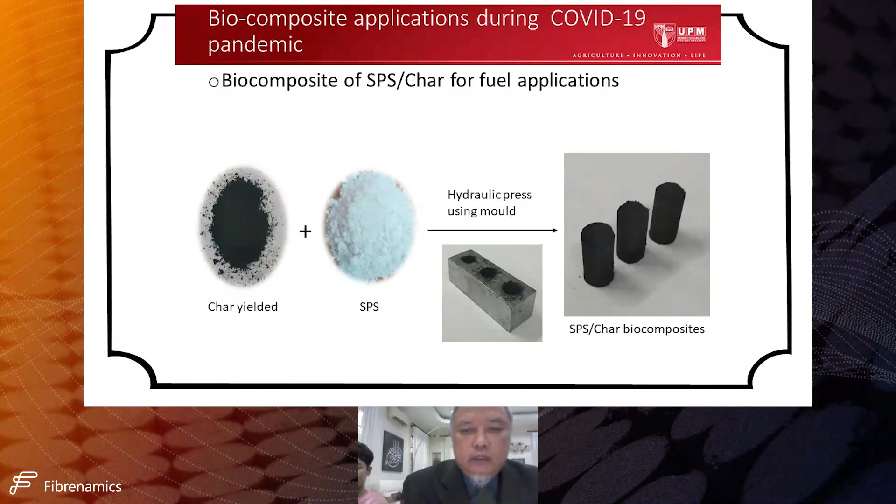So as I said, the strength is good when you add more biopolymer, and the heating value is also not so bad—still good when you add biopolymer, meaning biopolymer has a significant contribution to this COVID-19 biopolymer composite.

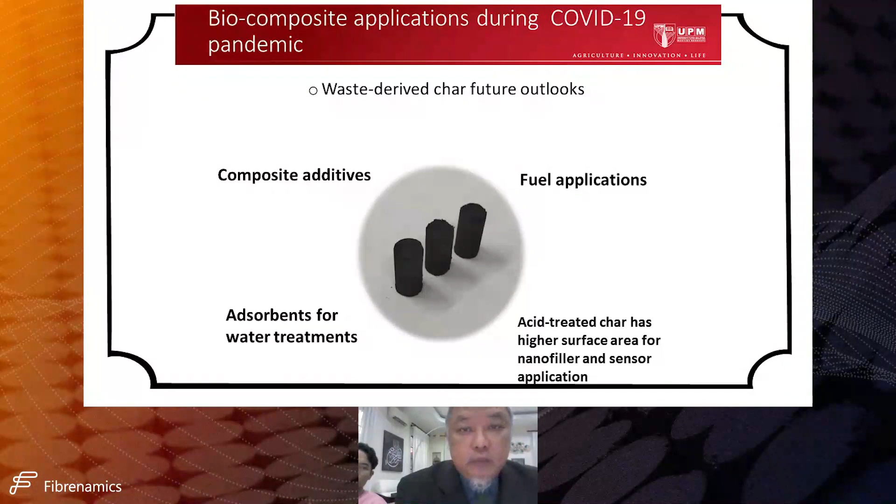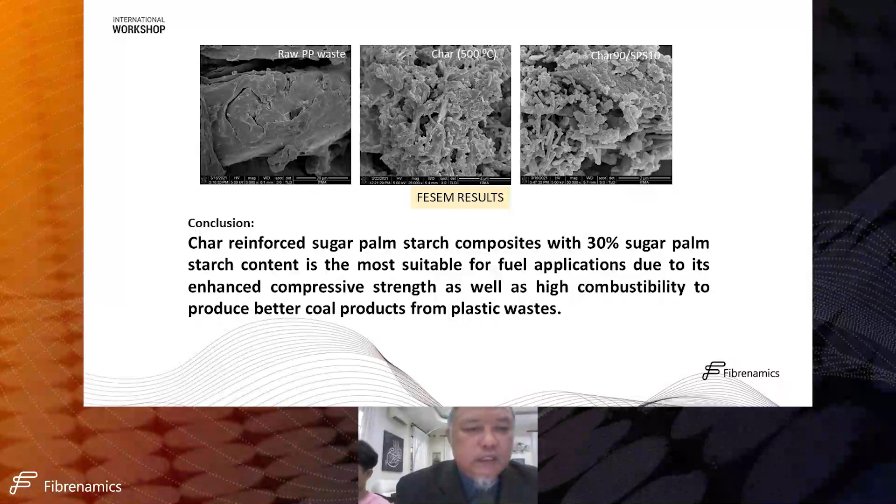We can conclude that char reinforced with sugar palm starch at about 30% sugar palm starch content is the most optimum, best suited for fuel application, due to its enhanced compressive strength as well as sufficient combustibility to produce a better coal product from plastic waste.

I just want to share some of our publications—maybe some of you can take advantage of this. You can see we are quite active in writing books.

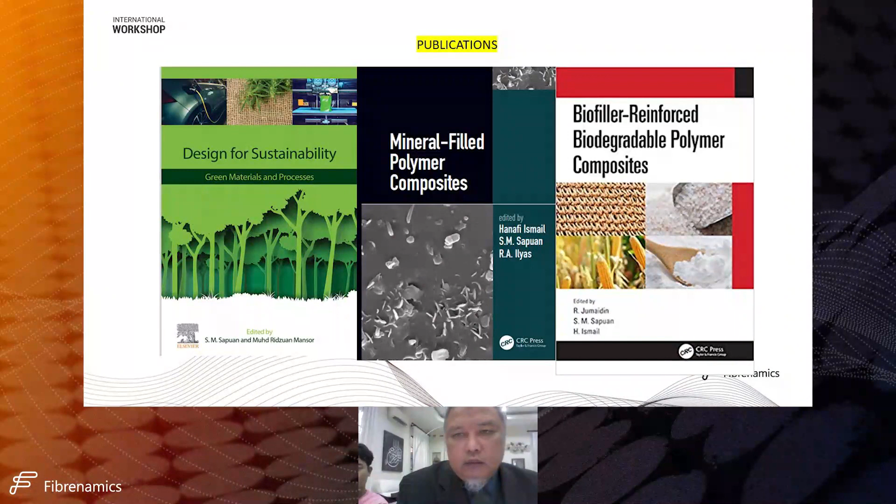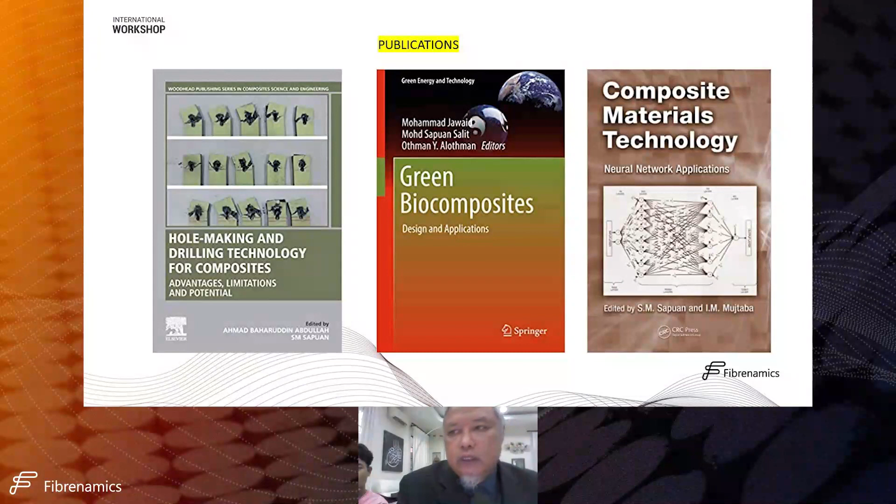And this is 100% natural fiber biocomposite from the plant, 100%. We've published on this also. We also use it in drilling process, hole making, and we've done some work on neural networks related to biocomposite, where natural fiber composite is also included.

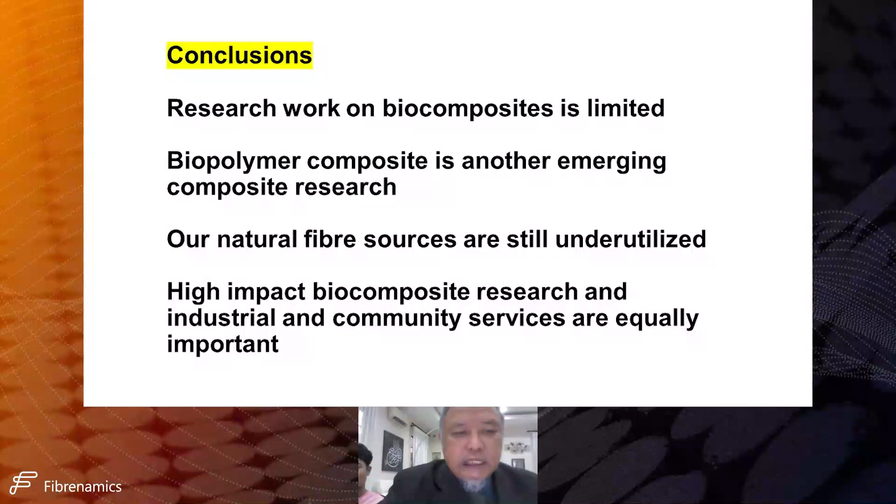Research work on biocomposite is limited, really, and biopolymer composite is another emerging composite research area. Our natural fiber resources are still underutilized. There's a lot of scope to work on. High impact biocomposite research and industrial and community services are equally important.